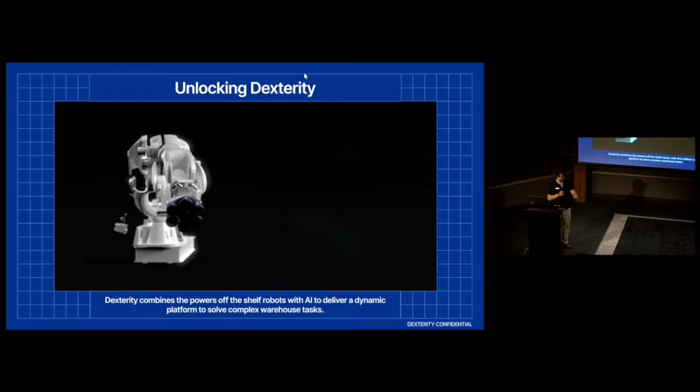So I want to start with just a bit of background on Dexterity, who we are, what we're doing, just to set the stage. Dexterity is a robotics company, and we're building a hardware, software, AI platform to really unlock the value of physical AI for all kinds of real-world tasks in the warehouse and ultimately beyond.

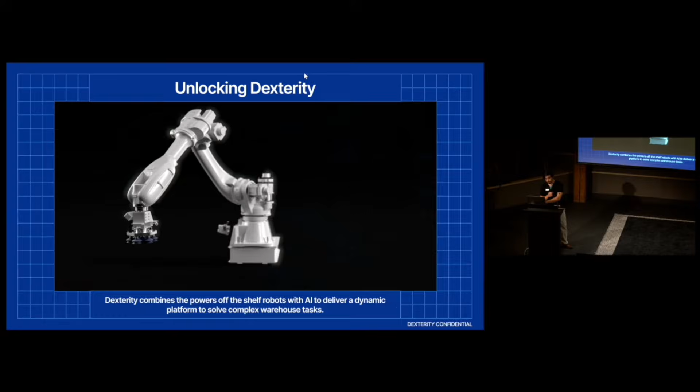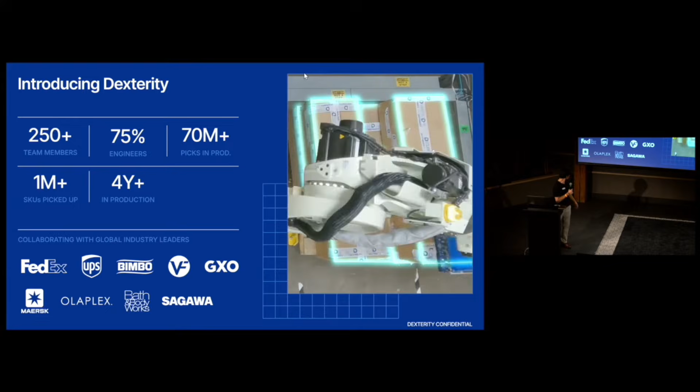A little bit by the numbers: we're a team of over 250 people, been in production for quite some time, working with customers who are leaders in their own domain, in their vertical. Some of these names you might recognize, FedEx, UPS, might have your packages shipped through them.

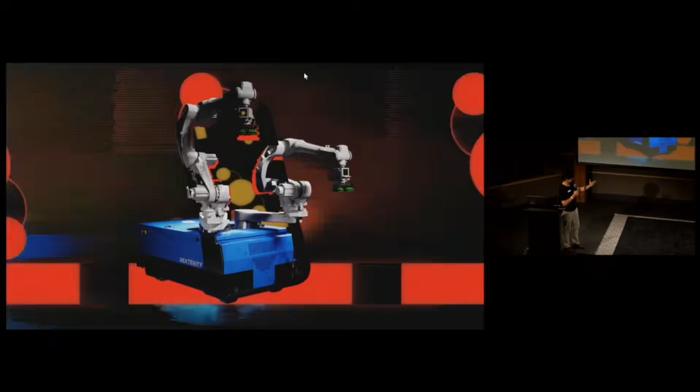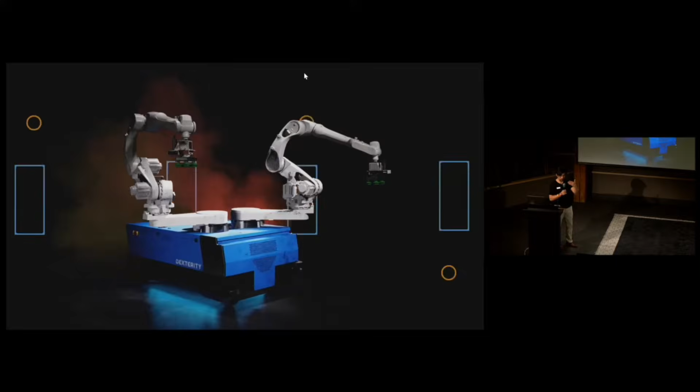But what do I mean by a platform for us? The easiest way I can describe this is with the smartphone analogy. There's the hardware, the actual physical device, the phone that you have in your pocket; the operating system, iOS, Android, that provides abstractions and a framework to interact with those physical capabilities; and then applications on top of that OS that really strive to understand the user's need and provide some value in the final solution.

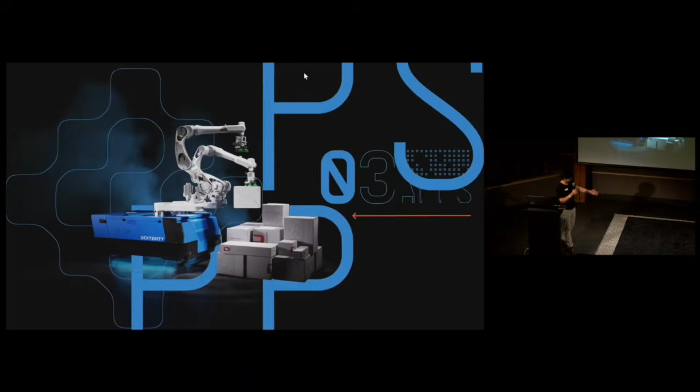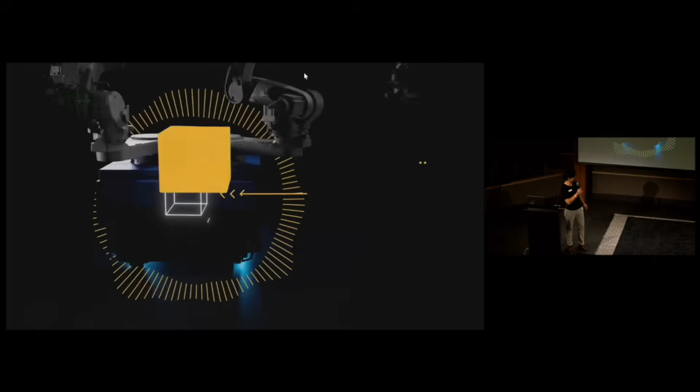So similarly for Dexterity, there is the physical product, the hardware that we provide, which you get a little sneak peek of here, officially launching in a bit, which has multiple arms, cameras, and a little roving platform to roam around.

On top of that, the equivalent of the operating system is this Dex AI software platform, which provides bundles of robotic capabilities as skills. And at the top layer, the applications, which leverage the capabilities of the Dex AI platform to unlock value for actual end customers.

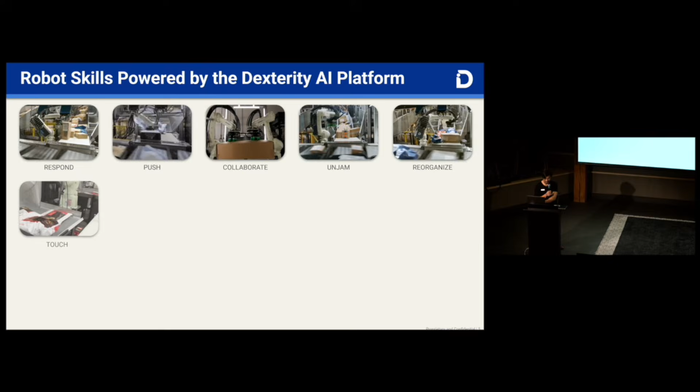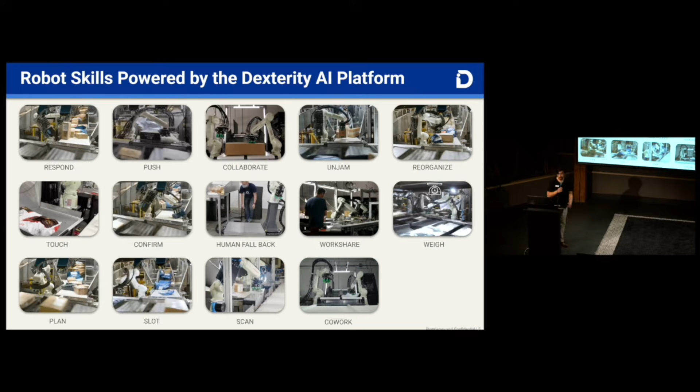And some of the skills offered by the Dex AI platform you can see in this little collage. These are all bundles of perception and motion and control that can be stitched together to really unlock applications in the warehouse. For us, some of the main applications we've been spending our time and energy on are truck loading, unloading, palletizing, depalletizing, order building. These are pretty universal throughout the warehousing space.

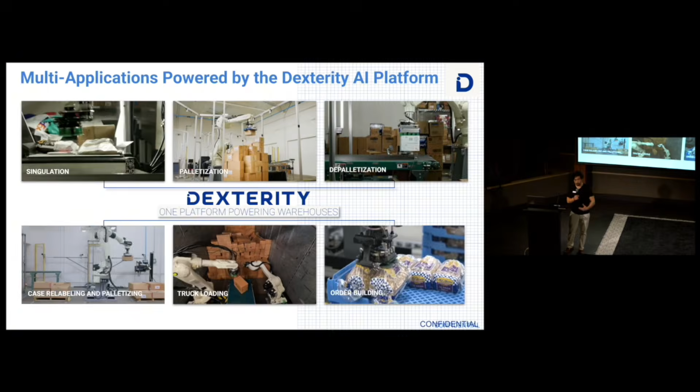But there are more applications to do with these robots on the Mech platform, and they're not all ones we're going to do ourselves. So we do intend to open this up to third-party developers. It's in early stages, but the first partners are already underway.

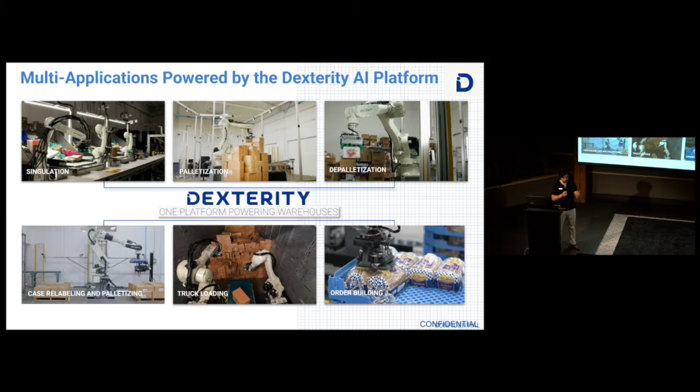So with the Mech hardware, the Dex AI software platform layer and these applications, we really are trying to bring physical AI to bear on some of these hard tasks in the warehouse, in the real world. I've mentioned physical AI a few times. I just want to clarify what I mean here, which is a model or a system of models that has a diverse set of multimodal input: images, video, in our case also force sensor data, pressure sensor data, maybe audio, sensor data of the agent's own embodiment.

So where is my arm in space? How fast is it moving? This understanding of self and a way to ingest goals and tasks to accomplish in the physical world. And internally, a system that's actually building a model of how the physical world works, either implicitly or explicitly, understanding entities and how they are interacting, their approximate dynamics, and again, a sense of self.

And critically, on the output side, being able to convey the understanding to humans through language or images or otherwise, but also to actually control actuators and make some physical change in the world. The thing that is super valuable in the warehouse is to actually move things around, not just understand, but also do. So physical AI for us is sensing, perceiving the world around us, making sense of it, and then actually taking action and interacting, touching the world.

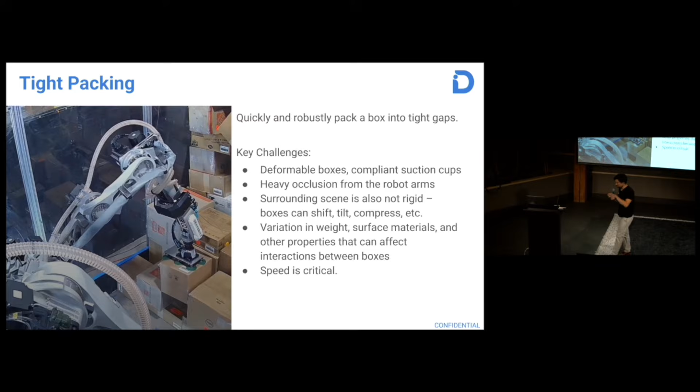So let's zoom into tight packing. Seems easy enough to put a box in a tight gap, right? I mean, at least for us humans, we do this pretty naturally. But some of the key challenges here are that, yes, the mech has a force sensor, but the boxes themselves are deformable. They might droop. The suction cups that are between the sensor and the box are compliant. And so the force signal that you actually get is not entirely straightforward to make sense of. It's affected by all these things.

And yes, there are cameras. The robot can kind of see what's going on, but often there's heavy occlusion from either the arms or the gripper, especially for smaller boxes. The scene around the place where you're trying to pack the box can also shift. It's not rigid. Things can tilt, they can compress. This is sometimes desirable, sometimes not. The weight and the surface materials of the box can differ from package to package, and the robot needs to be able to work well in all those cases. And speed is critical. It's not enough to just do this well, it has to be done fast.

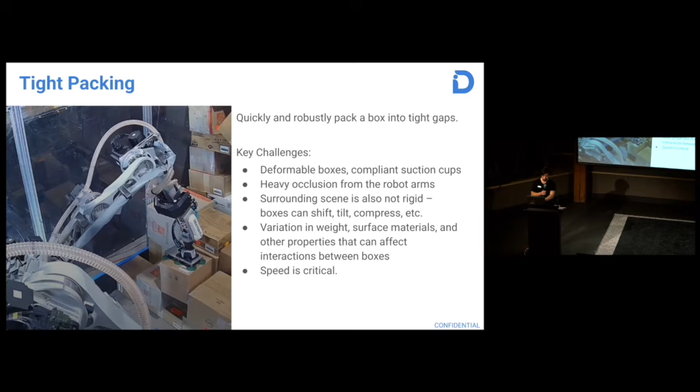And so on the Dexterity platform, we can look at some of the inputs that are available to tackle this. So one is the force and torque sensor data. Another is the set of RGB images and depth sensor data that comes from the cameras on board. The history of the trajectory that the robot arm went through to this point in time. And the goal and starting location. Like, what is it that we're actually trying to do? Where should this box go?

And the output is some form of control to the robot arm to decide where it should move in the space to try to achieve that goal. And so one way you might approach this is to take all of this history input of all of these different modalities and feed it through a transformer to ingest the context.

Based on that context, generate a short trajectory that can then be fed into other skills in the DEX platform to achieve the task. So these other skills can do force control at a higher frequency than perhaps you can do with this other AI component. And together, this can achieve the desired effect of getting into a tight gap. And that would work, but where can we get training data?

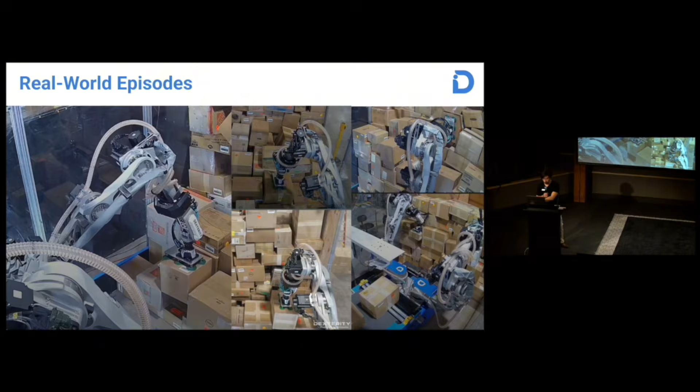So let's look at some examples of this in action. So here is this tight packing short horizon task working on a kind of simple case that happens fairly frequently. There's a small lip, and we're packing into that little gap. Nice and easy, no big deal.

However, there are more complex cases that also need to be handled by this capability. So in this case, there's multiple tiers of trying to descend into the right spot, into the target location, and you can see the mech kind of feeling its way through and trying to get the box into its final location.

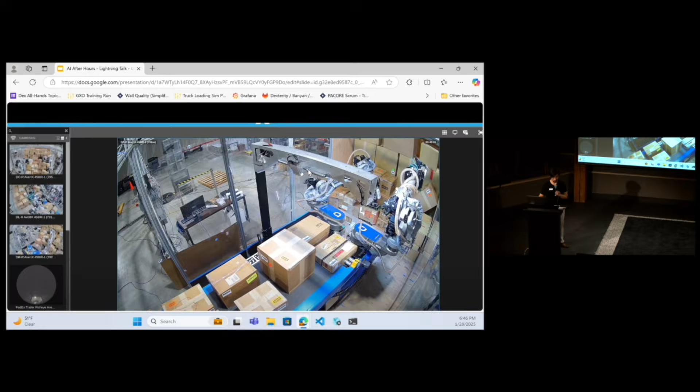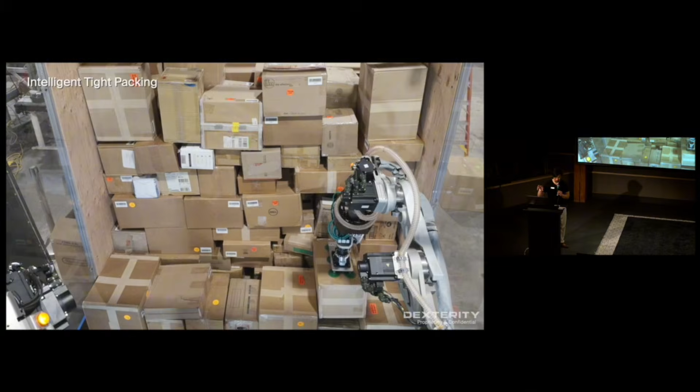In this case, it's a really tight squeeze, and you have this emergent behavior of actually wiggling the box to kind of get it into the final location. Often these boxes can shift out of the way. In this case, I think they're actually quite stuck, and so this little wiggle behavior is needed to get it in.

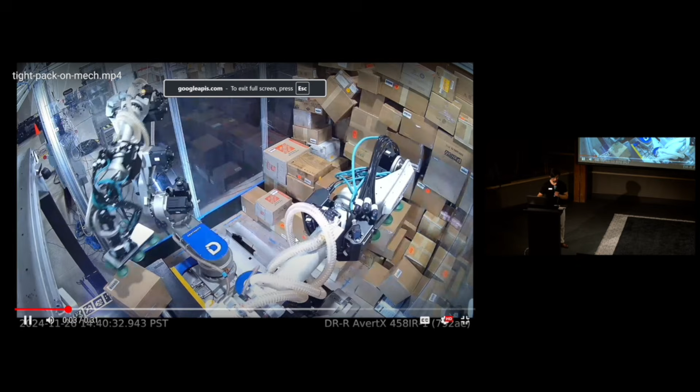In this case, after some attempts of actually trying to squeeze the box into the gap, it realizes, hey, we actually need a little more space, and therefore pushes even harder against the side boxes to see if it can shift, and you can make enough space there for the box to get into place.

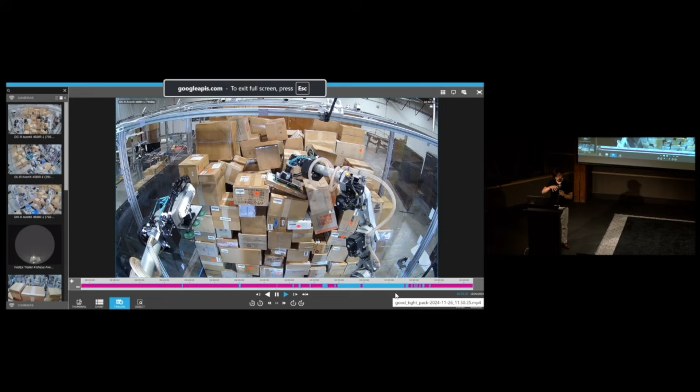And this last example is one where it was actually pretty advantageous to come in at an angle to really wedge this slightly oversized box into that final location. And so with these tight packing capabilities, again, we can minimize the wasted space in the truck. We can have things be closer together so they're more stable as it gets shifted, at least at a single action level. But it's not enough to just place one box in a gap really well. You also have to fill the whole thing.